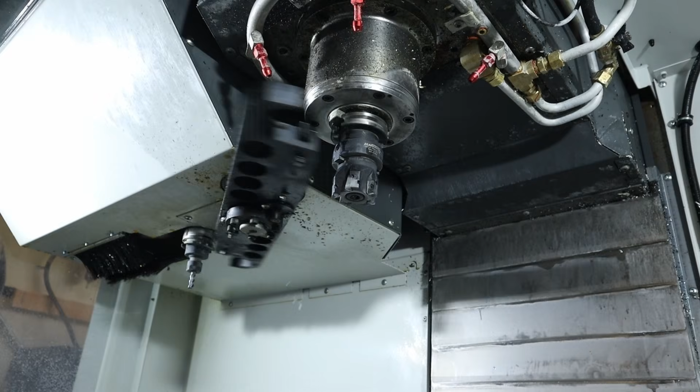27th of May 2026. Today we're going to be talking about links on the Modarra bracelet. There's a few different designs of these links that I want to go over. There's very small details, so I've shown them in the first video, but I really want to show these up close - little tiny chamfers, fillets, and radiuses. I've got Fusion pulled up. The goal is to make a master file, work on making a master program, and dial in how we make these links on the 5-axis.

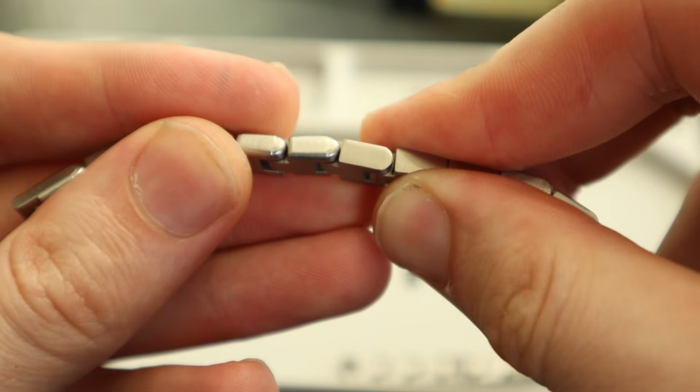Right there, between my thumbs, we have two different link designs. You can see the one on the right doesn't have much of a radius on the edges, and this one has much more pronounced radius, or a fillet, and you can see it there as well. So the question is, which one do we go with?

The one on the right, the sharper one, was the first design I had. It was simply easier to make - machining, 3D surfacing - and it was just like what I had in my brain initially. Then I made a handful of them, as you can see. I thought it would be too sharp, and I thought they looked too boxy and bulky.

So then I made these versions here that all have way heavier of a fillet, and they're just more rounded. Here you can see there's two flat ones on the right and two radius ones on the left. I like both of these.

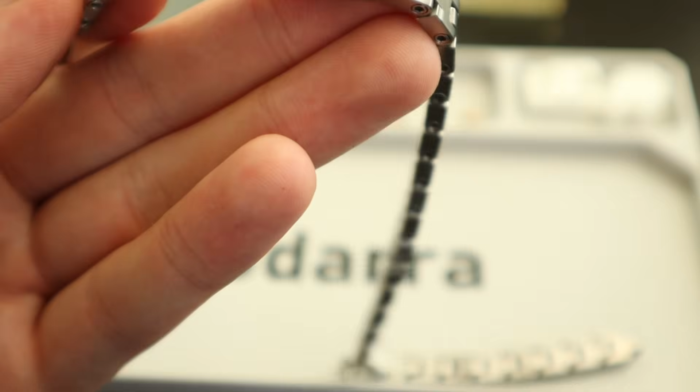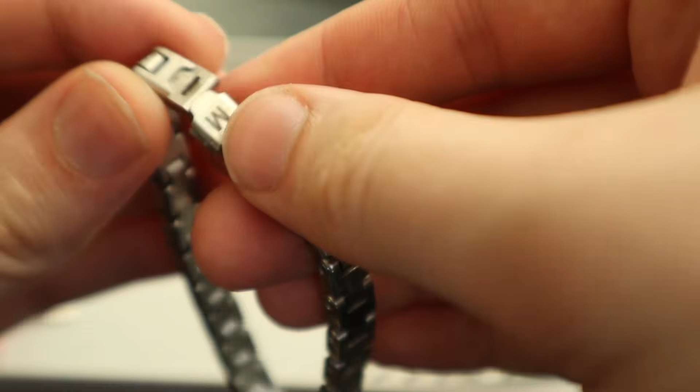Now I think we've got to pick one and make that the first design, and then we can play with this later. The clasp, I guess, is something to think about too - which one looks better with the clasp. The way the clasp I have is pretty heavily radiused. That's obviously totally changeable - any of this is changeable. Let's see if I turn this down. Is that a little bit better?

Again, we have some decisions to make, but the more I wore it, and after polishing it, I actually really like the boxier look. It reminds me more of a watch band. So I think that's what we're gonna go with, and then later on come out with the radius version if people want it. I really like how this one has more surface area to it, especially when it's polished.

So the one thing that is difficult about this is the way I'm making them - we have to deburr them as much as possible in the machine, because tumbling isn't going to remove a lot of material unless it's really aggressive, and I don't want that.

If you see here, you can see that little chunk that's been taken out. That's because I tried to put a fillet on it and the tool was slightly mismatched, and it cut too much into the side of the part on that sharp edge. I think I ended up removing that from the program, and it was just sharp edges.

So the edge that we're talking about here, if I get a pointer, is this right here - these two edges. They're not sharp, but they do catch if you're not careful. So we definitely need to put a radius on there of some kind, and that's going to be tough to do without getting a mismatch.

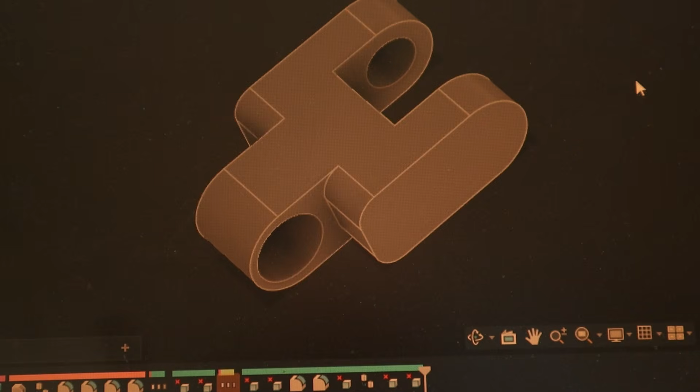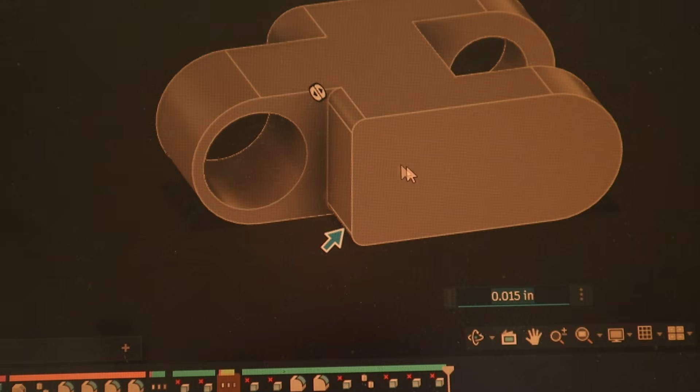Okay, so in Fusion, this is the radius that we're talking about. As of right now, what I was showing you had no fillets on it here, but it created these sharp edges here and here. Now again, the way the links interact, there's not much for this to catch, but I think we need to add just the slightest radius, not much - something like 15 or 20 thou, I feel like would be just enough where it doesn't take too much away from it.

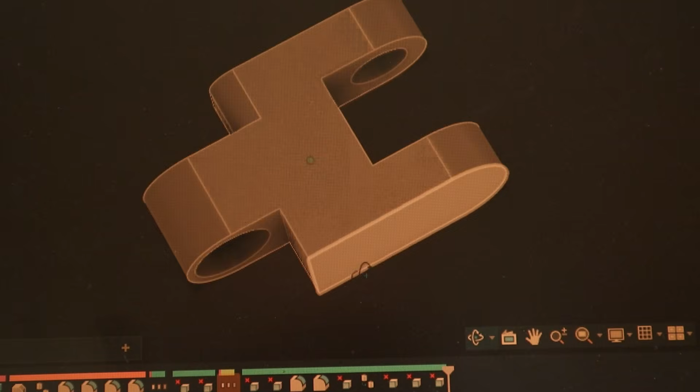Now, the other thing is, this is kind of a rough part file with no fillets or anything on it. In reality, what this is gonna look like is it would have probably, let's say, 20 thou there, and I think I had 10 thou or 15 thou on the outside edge, even on the sharp ones.

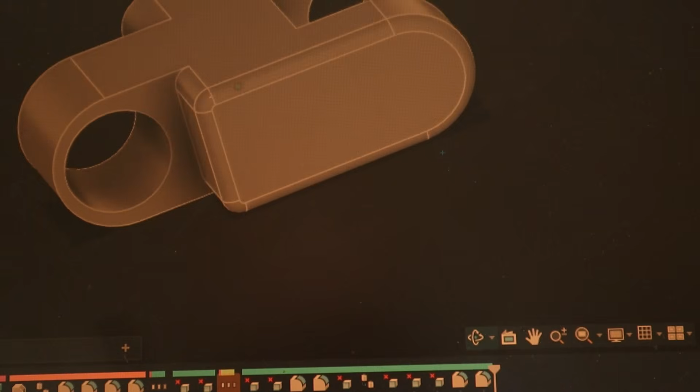They don't look like they have much of a fillet on that longer edge, but there is one. I'll probably have to check back my older files, but in theory, it's gonna look something like that. I think that's too much of a fillet on this side. I think that would look better with like the full radius, heavy radius, something like that in the future, but for now that is too much.

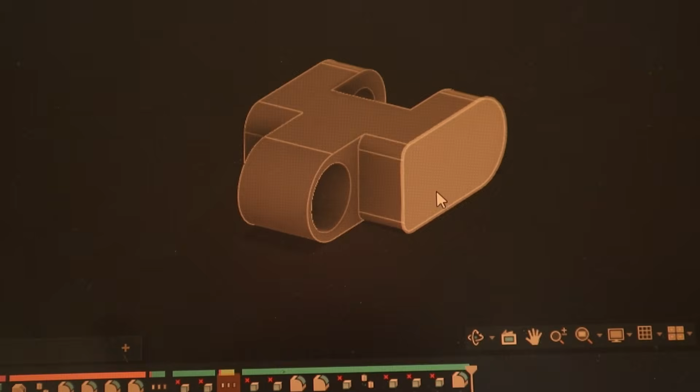So I'm probably gonna delete these, and I'm probably at 20 thou. I think I'm gonna check back at my old file and see what these were, and match that, or maybe increase it slightly, but that's kind of where my head's at as far as that goes. So I'm gonna work on that.

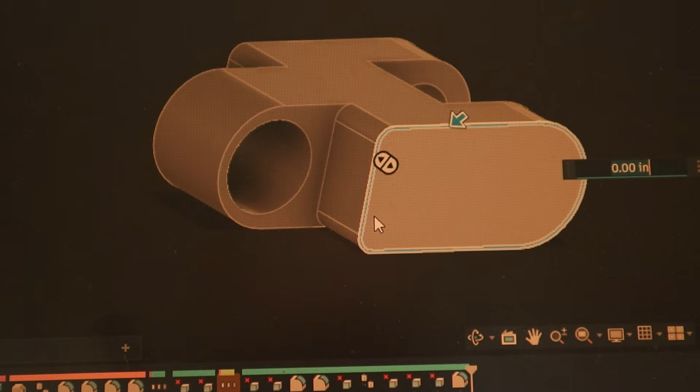I'll show you guys the program a little bit more here, and then we'll go out to the machine and make one. The other thing we have to figure out is the depth of this hole, where the screw bottoms out, that's something we're gonna have to play with a little bit more. I'm currently boring both of these holes because this one does get threaded for 4-40.

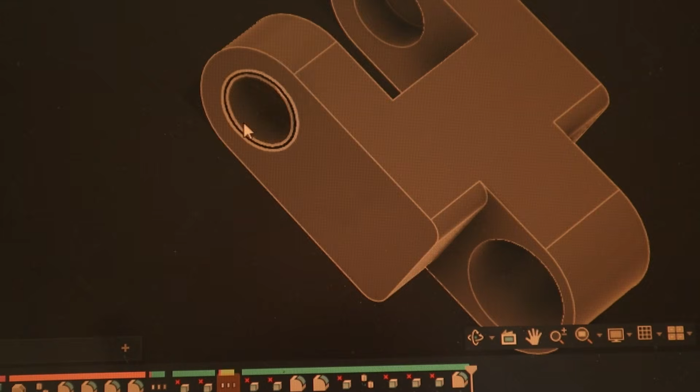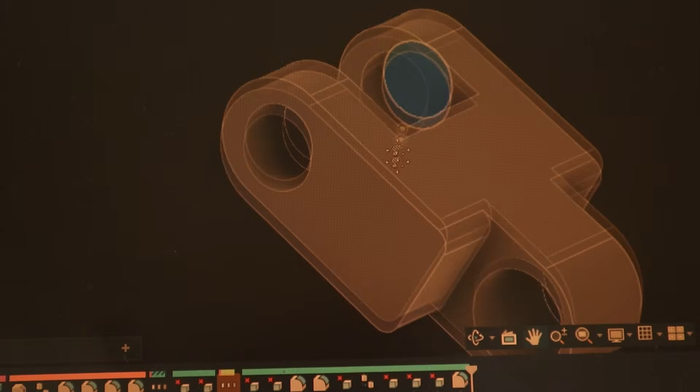This one is simply just a bore. I might end up drilling both of those in one shot to save a little bit on cycle time and tool life, but I'm also boring this because I really want the accuracy. I do like the flat bottom hole here, and there's not much material here to work with, only like 20 thou.

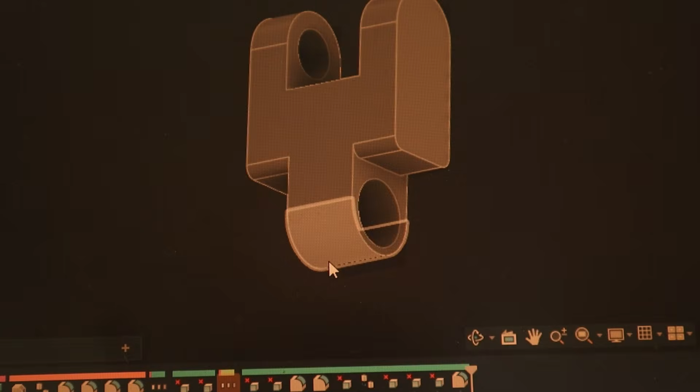So I'm gonna check back and figure out what these fillets should be. The other thing I was just gonna mention is we make these upright like this, and then op 2 is - well, there is no op 2 - there's a tab left on this radius here. I don't like that because there's no good way to remove that radius.

So what I'm thinking is, right now I have the tab off to one side. I'm thinking what I'm gonna have to do is center the tab, and then there might end up being a small flat, and these might have to have an op 2 where we flip them over and I buzz off the top, so there's gonna be a small flat. Now, if that's the case, depending on how much we take off, it's gonna create a really thin section on an already really thin part.

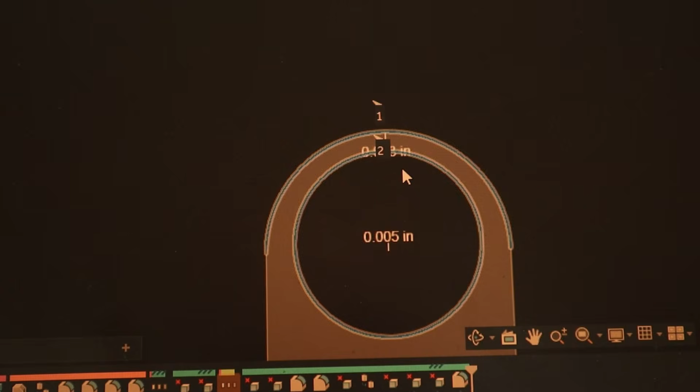That's already only 13 thousandths of an inch, so I might have to beef this up for an op 2. So that's kind of the next thing. The first step is let's nail down these fillets. Let's go make a few of these and then figure out how the heck we're gonna do op 2.

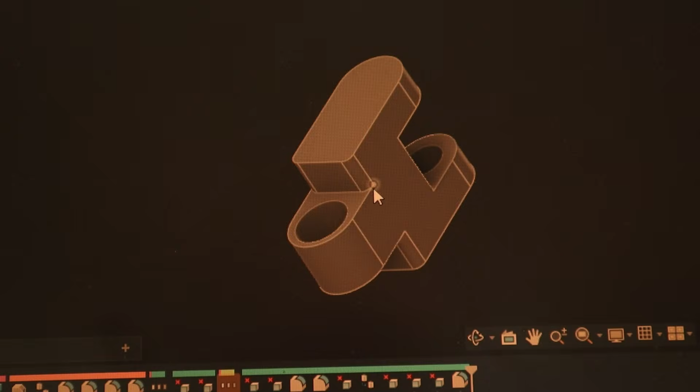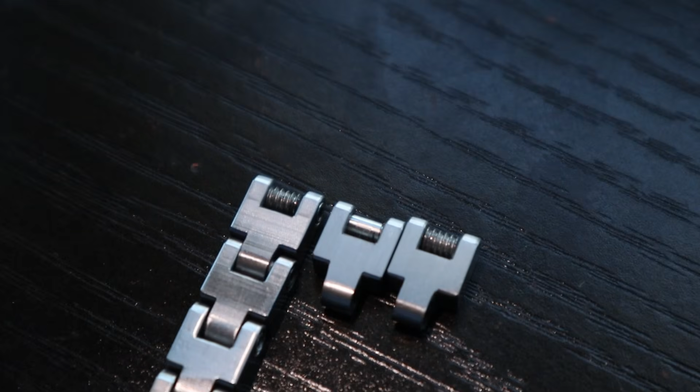Okay, I just played with some finishing, I wanna see if I can show this. So the far left link, it's gonna be really hard to see - you can see it's got, from this orientation, horizontal machining lines going this way. The next link over, I took and flat sanded - let's see if I can get this just right - I flat sanded with 400 grit, and now we have vertical sanding lines but no tool marks.

Maybe if I pick this up and kind of angle it in the light, you guys will be able to see that better. Yeah, you can see the vertical sanding marks a little bit more. Let's see if I can overexpose this. This is gonna be tough. There you go, you can kind of see that. So yeah, now we got vertical sanding marks.

So we started with this, right? Then we went to this, and then I did this on both of these. So this is like off the machine, 400 grit. This is then 400 grit and then 2000 grit, so it's even smoother.

It's so tough to focus on something so small, but hopefully you guys can see that it catches the light more, and it's definitely smoother. You're gonna have to trust my eye here, but it's not polished. Based off of the ones on my wrist that are polished, some of these give off way more light. So I think that's a good route to get rid of the machining marks, but I think we're still gonna have to tumble in some kind of a polishing compound to bring out the shininess of the stainless.

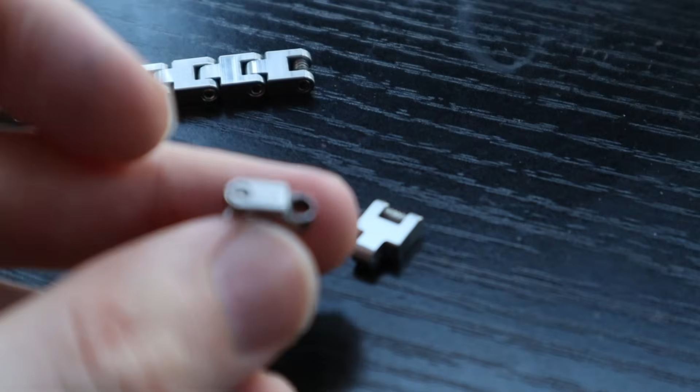The other question is, if we do have to sand these individually, which I really hope we don't, I hope we can figure out some aggressive tumbling method that will evenly pull out the machining lines, and then another tumbling method to polish, because otherwise we're going to have to sand on both sides, and then we're not touching the radiuses at all.

Like I said, finishing on some of these parts is going to be the process here that we're really developing, is how do we finish such small parts. So if anybody has any information on tumbling that they think would work on this, I'm all ears.

That's something I wanted to go play with tonight. The machine is currently busy making something, so I can't go down there and make links, but the next video clip should be us playing around making a new link.

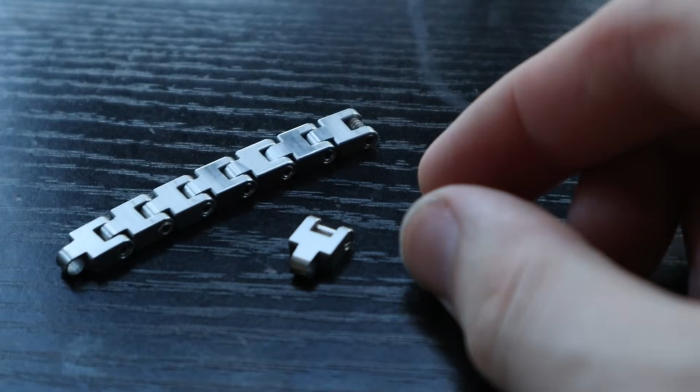Okay, so I've reprogrammed the new link. I made a new file that has the new fillets and all of that fun stuff on it. Now what I'm playing with, while this is still loading and simulating, is how I'm tabbing this part off.

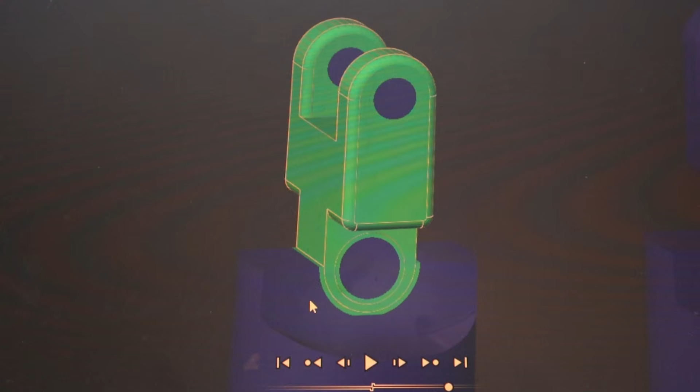I'm trying a different tab method than I did the first time. I think I mentioned how I did it off to one edge here. This one will be a center tab on this radius, and then I'm going to come in and make the tab even smaller.

Before it gets fully cut off, if you will, or gets to the point where it's going to just fall off if I machine any more. So I still think the tab is a little bit too wide. I'm using an 1/8 inch end mill.

Let's wait here for this to load a little bit more. I might have to drop down to something smaller, 1/16 of an inch. I really don't want to, because I want this radius to be cut with the same tool.

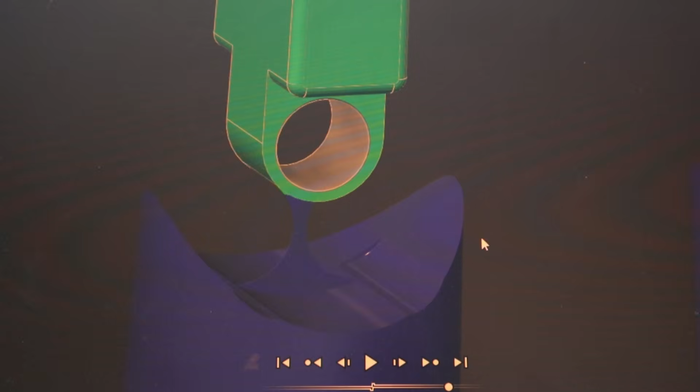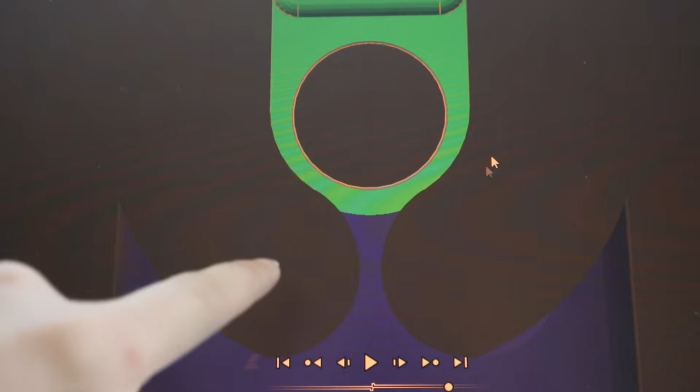Okay, so here you can see I am machining this pretty thin. You can see this 1/8 inch end mill coming in here creating this, and this is basically the width of the tab right here.

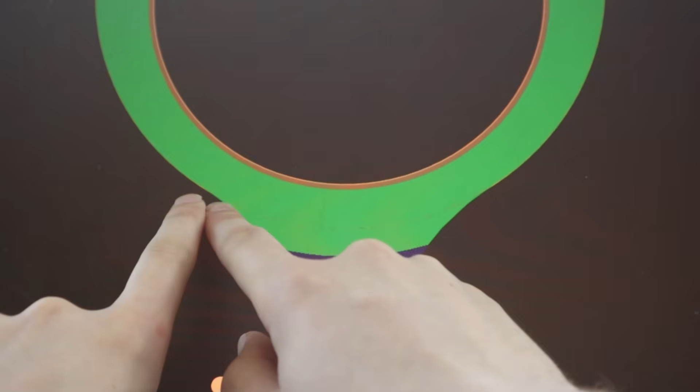So the problem with that is if I go to do an op 2 from about here to here, that's where we would have to machine this flat, and then this gets extremely thin.

And if I rotate this, you can start to see what that tab would look like. Now the problem is I don't know an easy way to finish this if I don't do an op 2 in the machine. I really don't want to have to do an op 2 in the machine.

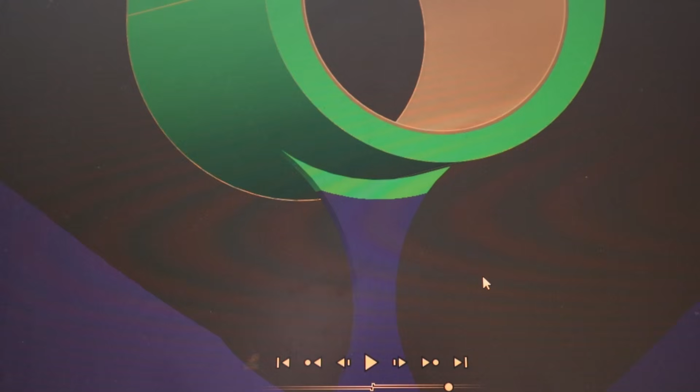This might be small enough I could hit it with sandpaper, and then after tumbling it could blend. That's one hope. It's this weird limbo where I still don't know how these are going to get fully finished. I have an idea on how I'm going to finish the flats, but regardless, this is going to get tumbled somehow.

So that's the current tab. I haven't tried this yet, so we're going to try this. You can see I have this fixture where I'm making, what is this, 8 or 9 of them at a time. I'm only going to make one at a time here, and we're going to prove this out.

So I've got to figure out in Fusion how I get rid of this pattern feature, because right now everything's patterned.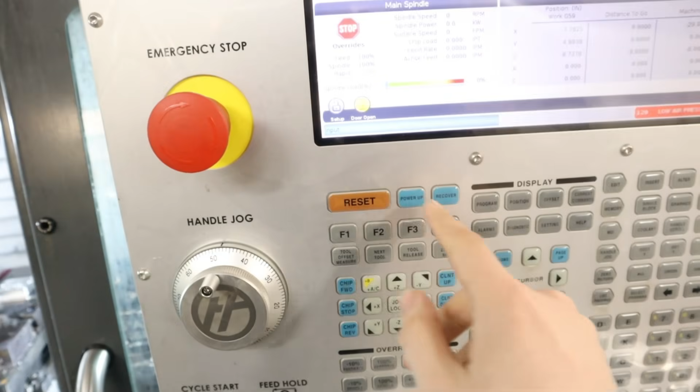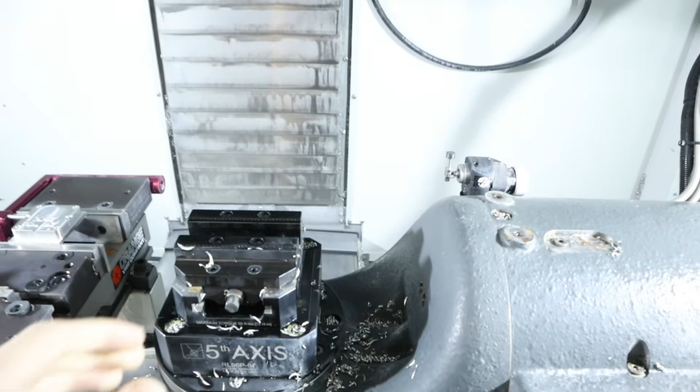Alright, so we're going to be using the TRT 210 here. I'm going to put in some parallels here. We've got our fixture that'll go in here. It's just a piece of steel with these V channels cut in them, and then we've got set screws.

This seems to work really well for holding the parts. There's not a lot of machining forces on them. So we're just going to use this first spot for now to prove out our program, and then we can pattern it across and do a whole set. That'll obviously speed up cycle time because it'll be a lot less tool changes.

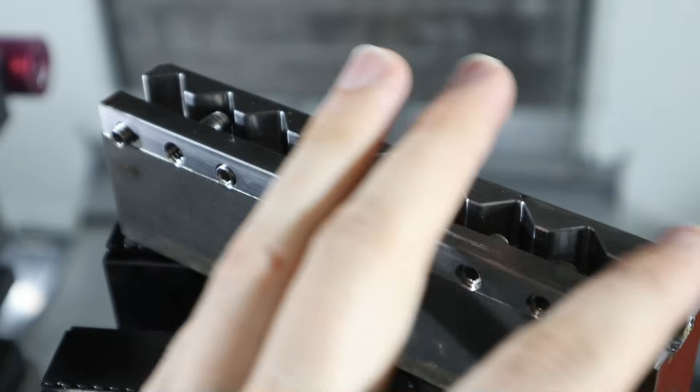We can use the first tool, a 3/16 end mill, on all of these parts, then change to the 1/8 inch end mill, and go to the ball mill, etc., etc.

So this I made a while ago for testing, and it's been great. Before, what I was doing was using a collet block and putting one little stick of material in at a time, and that was a pain in the butt because I had to undo the vise, take the collet block out, undo the collet block, and reset it every time. Versus this, I can just leave it in the vise and do everything with an Allen key.

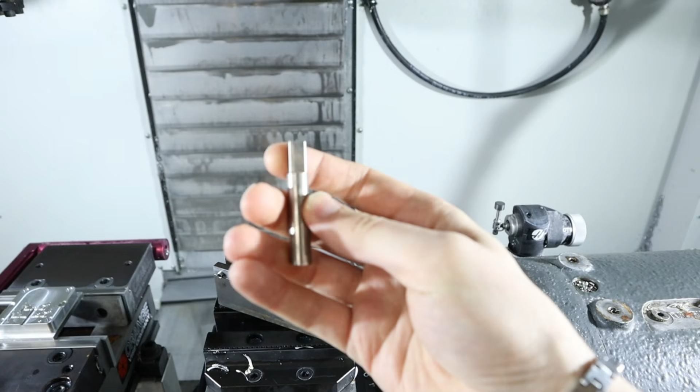One thing we are going to have to start to think about - this is a bad part that I stopped for some reason, but as you can see here, we can focus this. This is a little bit long, but there's a lot of wasted material because we're putting this in here like so, and part of the reason we need some of the height is to get further away from the vise and the fixture so we don't have any collisions.

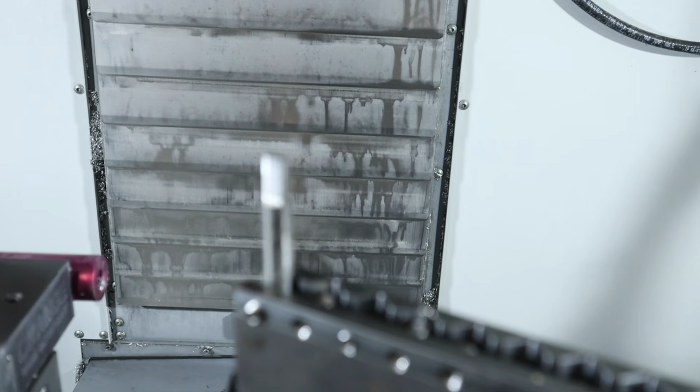So for now this is okay because we're just testing, but once we go to production we're really going to want to start to think about this from a cost perspective. Luckily, this material is pretty inexpensive - it's not like this is titanium or anything. But when we go to those more exotic materials, this is something we're gonna have to really think about.

Obviously, I fully understand that this machine is not the ideal machine to be making these parts, but it's what I have. Until we prove out the business and the products and whatnot, I think we're just gonna have to use this. Long term, a Swiss and like a Willemin style machine for something like this would work really well. So that's what we got for now, so we got to make it work. These are our constraints and we're gonna work with them.

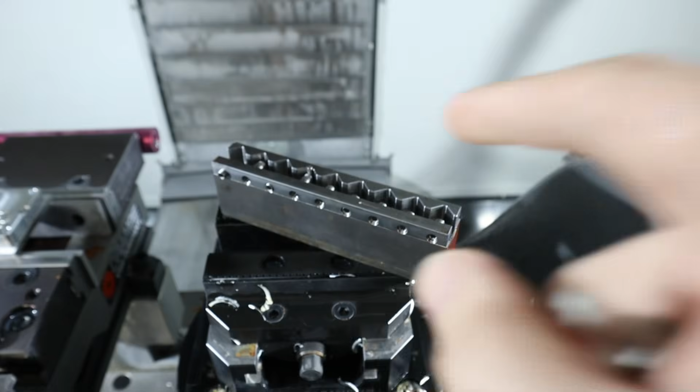So I'm gonna load this up with a parallel and then get a little piece of material ready to go.

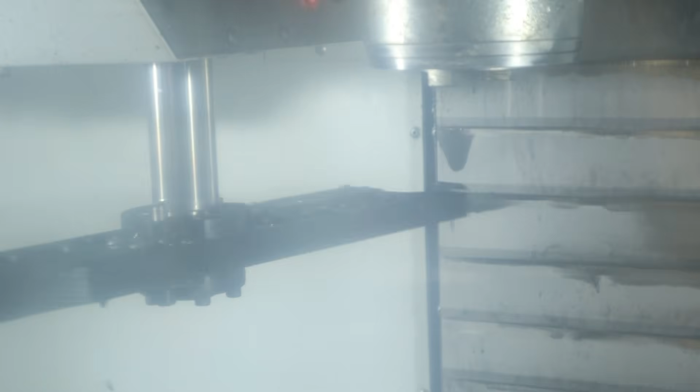Okay, so let's move this guy over here, and I need to double check. I believe my Z0 is just the top of this fixture, but I know X and Y are just the center of this, so we're just going to center this up.

Look, you guys, it's actually a pretty good angle, I feel like. Okay, so where's my tape measure at? 6 by... inch. Yeah, alright, so that should be fine.

How did I do this last time? I think I might have done it off the corner, actually, because the center slot was - oh, maybe I just went far enough down. It's a good question, I don't remember how I did that. So I machined this edge around the top, and that was for probing reasons - I wanted something that was machined when I machined that. Now, granted, this really doesn't matter. I think I just went off the non-machined surface. I think that was fine, because if we're within even 5 thou on this, we're totally okay.

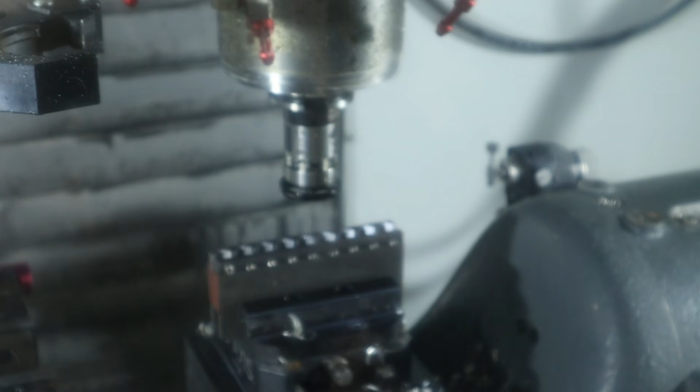So we'll do single surface, minus half inch. Okay, so this should be fully probed in. So you guys in focus still? Yeah, okay, this should be fully probed in. I'm gonna go check my program.

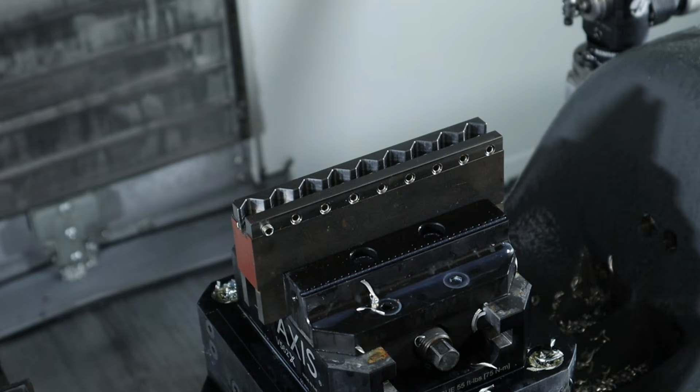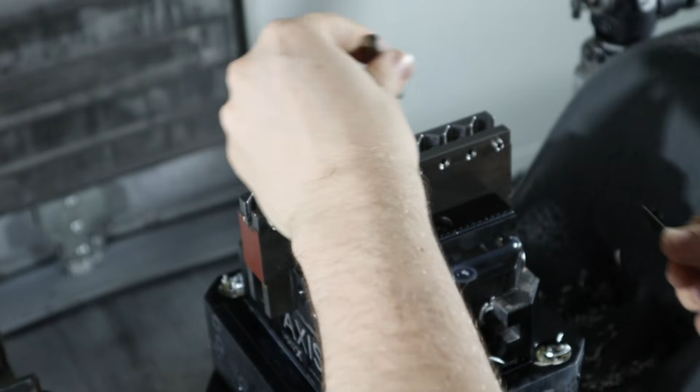I'm gonna cut that piece of material, we'll load that up, and then let's run it. Okay, so we got our first blank, double checked, top center of this is indeed our G57. We've got a blank that's 1.56 inches long. I wrote that down because we're going to start with that and see how small we can get that in the end. But we don't need this thing to be completely bottomed out. We only need it to be enough to be contacting the set screw. So as of right now, let's see if I can...

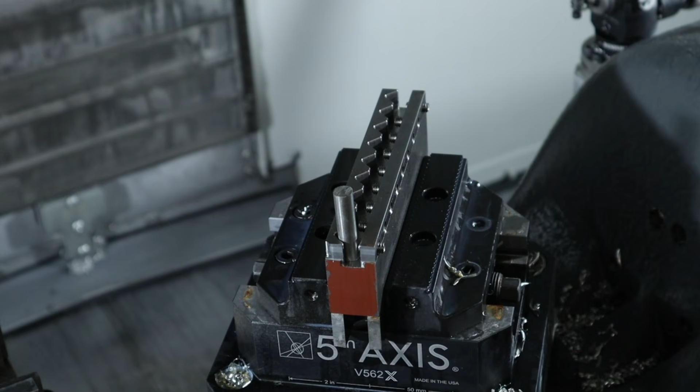I don't know if you'll be able to see this or not. Yeah, maybe. You don't need it up against the floor of this fixture. So if I get in here, you just need it to be in contact with that set screw. So I'm actually able to come off the floor. That's probably 3/16 of an inch right there.

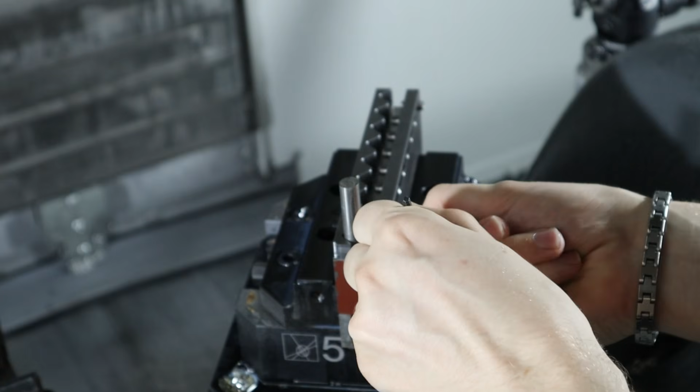So I'm gonna go ahead and tighten this down, and we'll find a torque value for this eventually, but I'm going just kind of off feel. But surprisingly, the bottom of these set screws actually dig into this steel just a little bit.

It would be interesting if this is the way that we end up having to go just temporarily while we are using this machine to make fixtures. It would be interesting if we modified some set screws to have a little bit more of a point to them to really grip into the material. I could see us doing like a crosshatch pattern of teeth. But for now, this is gonna do.

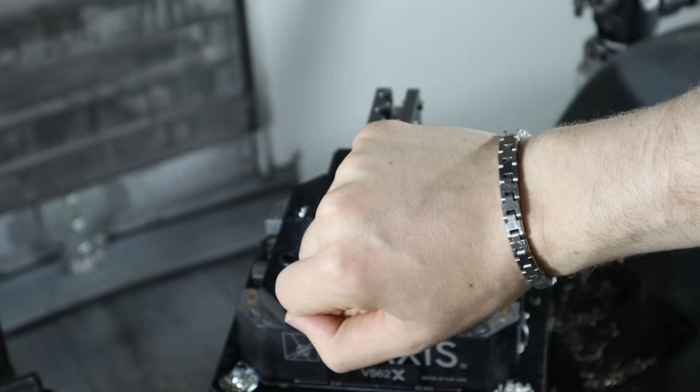I also just love how my bracelet is just always in the frame while we're talking about what we're working on. I think that's kind of cool.

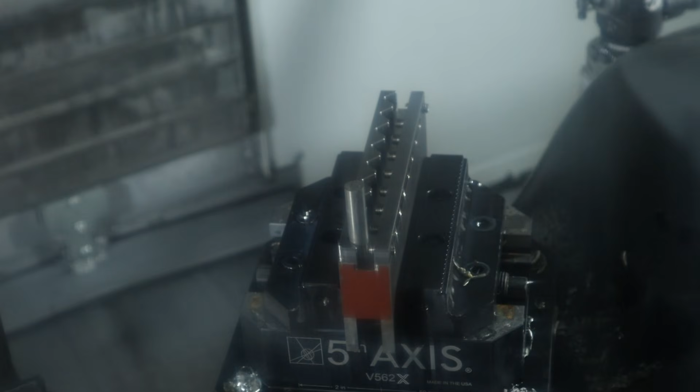So, all right, that's in place. Program is loaded, we should be good to go. So let's see how our viewing is once we get started here. I might have to readjust, but let's go to this. We're gonna start off with a facing op.

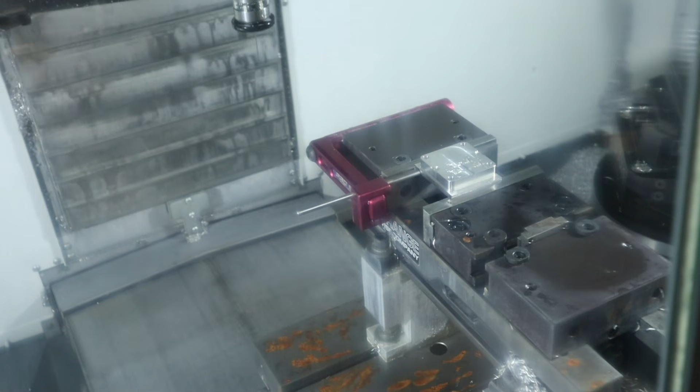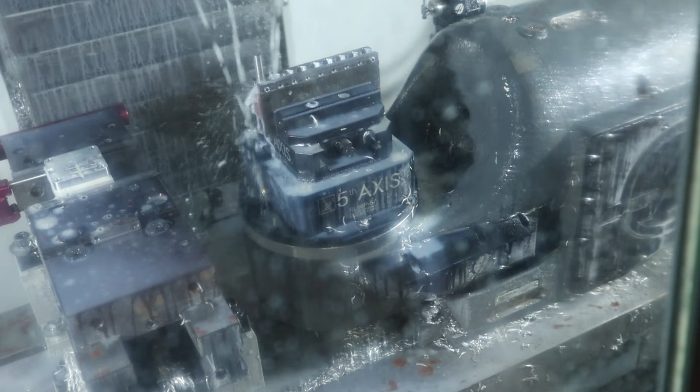I'm gonna have to wait here for a second. I'm gonna go over to our safe position here. All right, how is our angle? I have no idea if I'm gonna leave this footage in or not, but I figure better to have it. See if I can try to focus it on there. All right, now I gotta go full machinist mode here and watch this work.

Okay, so already I can tell you our stock is too short for this program, so we're gonna have to repost. I had to reselect quite a few things geometry-wise. This should work. All right, let's give it a shot. Here we go, see what we got. There we go.

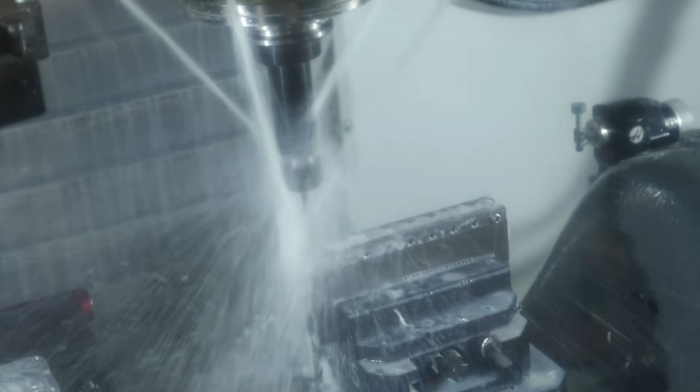So we're gonna face off a little bit here. Definitely a little bit of chatter there. 8,000 RPMs, 15 inches a minute. I don't remember the depth of cut.

Okay, now we're gonna go in here and we're gonna cut the profile. I'm pretty sure this is just a contour with multiple passes. I really should change this to 2D adaptive, because I feel like it's taking larger cuts when it's entering there. Still 8,000 RPMs, this is 10 inches a minute. Again, I'm not trying to make this fast right now.

All right, so we just finished machining the link. There's a bunch of little tweaks to this that we got to make as far as tool paths go, some efficiencies on the machining side of things, and then actual cutting of these features. So we start from the top. I slowed down a few speeds and feeds. I added through tool coolant to a few operations.

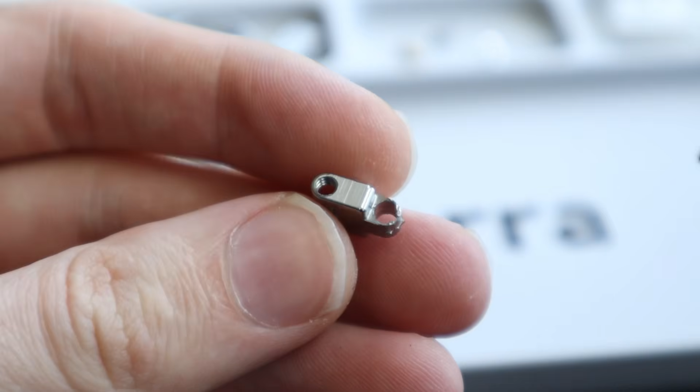And then the first issue that I see, if we flip this link to the side here, when we go - let's see, where am I? - when we go to cut this here, and we cut the fillets on these walls here.

Now the problem that I see, and I don't know if I'll be able to pick this up on camera because it's so small. We have one side here, you can see the fillets right there. Flip it over, see how it's machining into this face here.

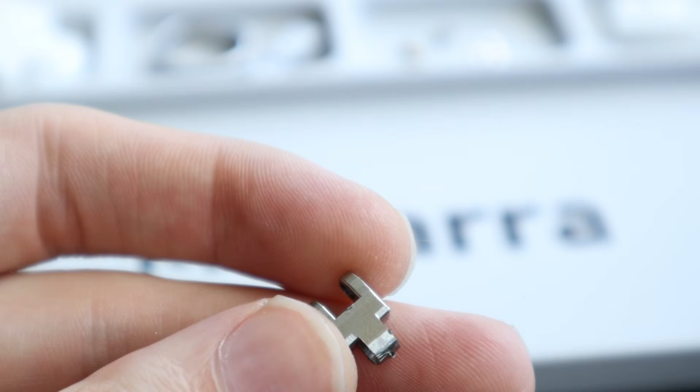I don't like that. What I'm wondering is, if I look at my tool paths, this is all done by Tool 22, which is a 3/16 end mill. If I click through these, I'm wondering if that shouldn't be cut by that tool, if that should be cut later by a different tool, being the 1/8 inch tool.

But again, the only reason this would be happening is if this is shifted left or right just slightly. If I look at this off camera, it's barely doing that, got to be like a thou or two, but it's obviously visible enough and I don't like that. That would cause problems down the line in finishing, so I got to figure that one out. So I might try reselecting those finishing tool paths and have that get cut later by a different tool.

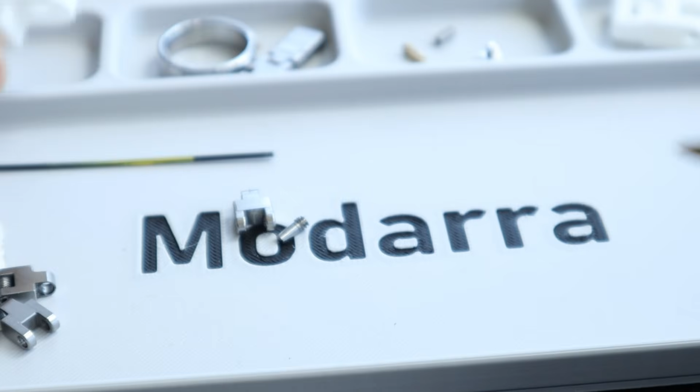The next thing is when we go to cut this slot in the top. So we have an adaptive tool, an 1/8 inch tool that comes through here, and full depth adaptives this, more or less slotting it. And then I have a finishing pass that comes in. Again, if I use my larger example here, it comes in and finishes the floors and then this internal radius here on both these kind of tongs, if you will.

The problem with that is I had a lead in and lead out that was set, and I don't know if you'll be able to see this. You can definitely see it on this side. It was cutting into this surface here, and it was coming out, leading out, and cutting this. It's barely noticeable, but the problem is I see the step over line and I can barely feel it with my fingernail. I don't know if I can show this, right there.

So I changed the lead out so it shouldn't do that anymore. That's a pretty straightforward fix.

Fillets on the top, these radiuses on the top of the tongs, I'm still getting this little step over line again. I think I showed this before, right there, you can see them. I think the only way to fix that, I feel like that's probably my set bottom Z height for the toolpath, so maybe I have to extend that.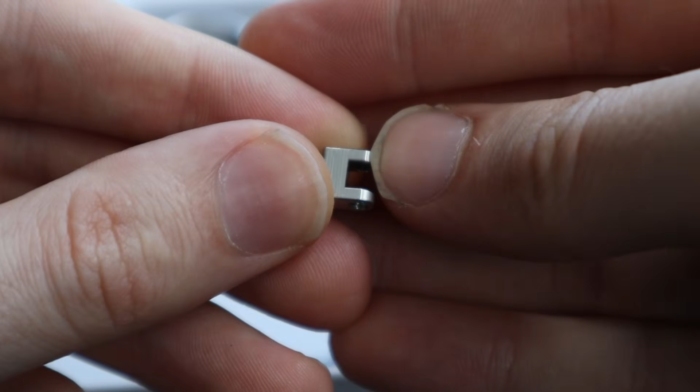But the finish on the tops of these is really nice, I'm really happy with the finish of those. But again, it's just a mismatch right there, you can see it by my fingernail. So gonna have to play with that.

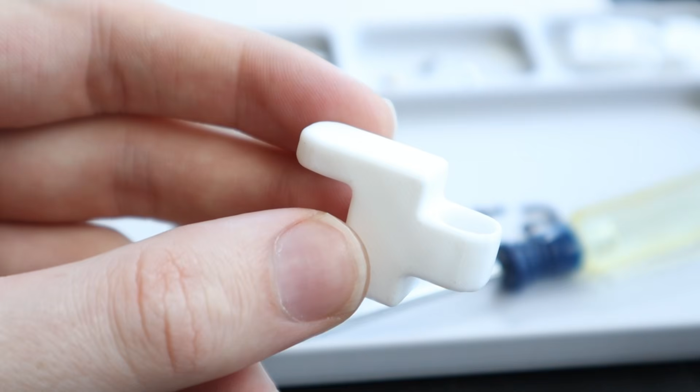If we keep going down the tool paths, one thought was, if I use my big example here, we have a fillet all the way around the top of this part. We're cutting it in a bunch of different operations with different tools, and I'm wondering if I should remove that and cut them all with the same tool. Because we have these internal ones being cut by the 1/8 inch, that's fine. But we have this top one in this orientation cut by the ball end mill, like so.

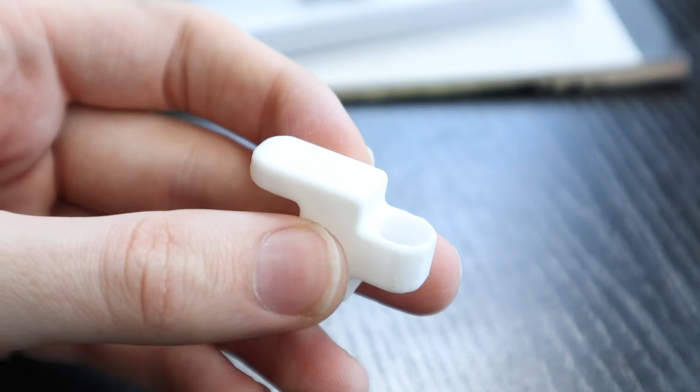Let's just do this, let's move this back, like so, and that's cutting this outside part. The first tool that comes around and profiles this is cutting these long edges, and then we rotate it and cut these 3 fillets here with the same ball end mill. So we're not using the ball end mill to cut all of these.

I think that's a mistake. So I think what I need to do is remove the first tool that profiles this, so it doesn't profile those fillets. When we come to rotate here, I'm just going to do all of these fillets in one shot. I feel like that's the best approach here. It's gonna add probably to the cycle time quite a bit, but if that's what it takes, then that's what we're gonna have to do.

I think that would clean up some of these fillets. One thing to note is this is, I believe, our 15 thou fillet. If we lay this next to a 10 thou fillet, I don't know if you guys can see the difference, but it's definitely more rounded. Hopefully it's not too much, so that's something I gotta pay attention to.

The tabbing didn't work. There's two operations, the left and the right, that do the final tabs I showed you guys. After the first one, this thing flew off. Luckily I saw where it went in the machine, so you can see it's all chowdered up there.

I also think I'm gonna need to order a small spot drill to chamfer this top threaded edge and both sides of the link hole. They have burrs right now, and I'm not chamfering this hole before I thread it, so that's definitely part of the problem. That would add an actual decent operation there. I think I'm gonna play around with these tool paths and come back when I have something.

This is now my... let's see, we did this one here, then this one, then this one, and now the one I'm just on. So this is the fourth one we've done.

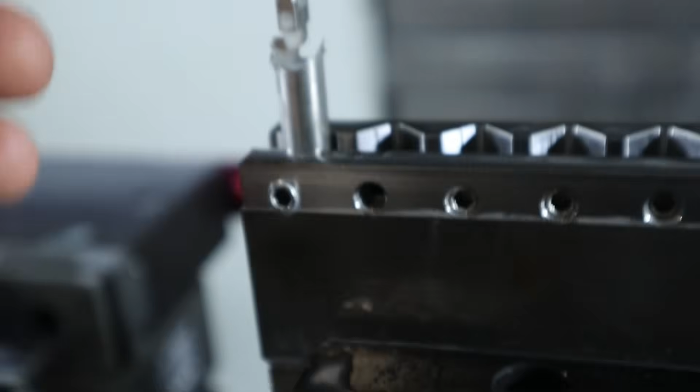We didn't fully tab it off. I could break that off if I wanted to, but this is going to be testing a lot of new things, so I'll get this off and get up close with you guys.

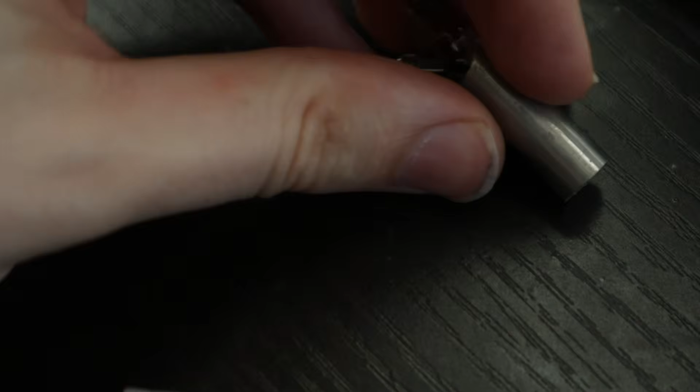All right, so we've made four parts today. This is the latest, and I'm going to try my best to show you guys the improvements here. The biggest thing was getting these flat faces to be as clean as possible, and then getting the edge breaks to work properly. So this is my pointer here.

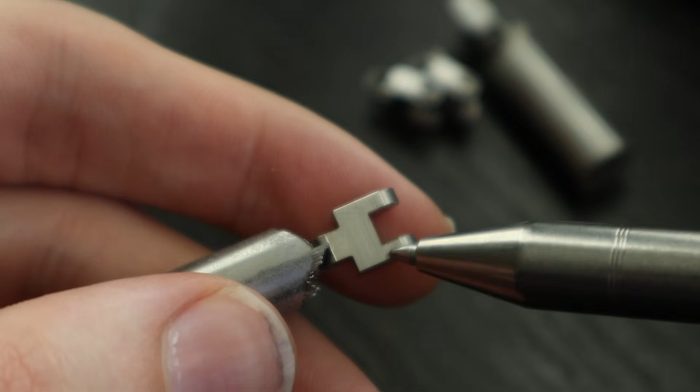I hope that's gonna focus okay. So we'll just go for it. You can see how these faces are nice and flat here. What we had on the first part, you can see those lines there and there. That was the lead out from this toolpath here.

We were having these lead ins and outs mismatch because those were radiuses of the tool going around like this, so I changed them to chamfers. Now there's no lead in or lead out. Well, there is, but it goes off at an angle and it's tangential, so it doesn't actually touch this face at all. Even if it was mismatched, it would just make this chamfer slightly larger than the other side, but we're talking about literally like 1/1000th of an inch here, so you're not going to see it.

But obviously, if there's a lead in or lead out mark on this face, you're going to see it like I just showed. So we got rid of that, and did the same thing on these edges here. Now it's just a chamfer here and here, and these radiuses are now changed to small 5 thou chamfers around. You can see the light hitting it there.

That's all 3D machined from this orientation. This whole edge all the way around is machined in one shot using a 16th ball. So instead of doing part of the radius here, then part of the radius here around that side, and then doing it there with three different tools, we're doing it all with one tool in one operation, and then we rotate it and do the same over here. So that has been amazing.

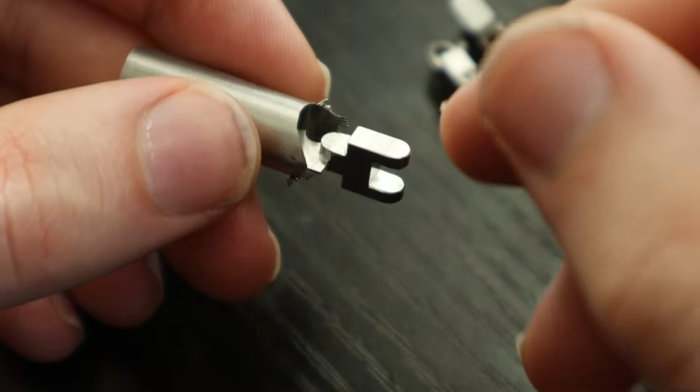This one I didn't drill or tap simply because I wanted to prove out everything else. The drilling and tapping was fine up until this third part. I broke a tap, I don't know why.

Along these long edges, I changed it from a fillet or radius to a 5 thou chamfer, so we actually went smaller. It was originally 15 thou radius or fillet, and now it's down to a 5 thou chamfer. I actually like this more. It's just enough, it catches the light, and shouldn't cause finishing problems down the line.

There's still a few minor problems with this part. We might save that for part 2. There might be two parts to the links because these might take me a little bit longer to figure out.

But there's some tooling I want to order. We are currently boring this hole here and this hole here that we tapped for 4-40. There's no real reason we need to do that, the more I thought about it. The only thing I need in theory is a flat bottom hole on this second one, for our custom screw to bottom out. I think we could get away with drilling both of these. I know for a fact we could get away with drilling this one - it doesn't have to be tight tolerance at all. With a carbide drill, I think we could hold plus or minus 2 or 3, that'd be fine. And it'll be way faster, that's the thing.

So I timed it on the machine because Fusion's estimated machine time isn't really that accurate - there's a lot of variables there. I timed the boring operation for this hole and this hole, and it was like 1.5 minutes. For a full bracelet, which is 25 links, that was like 30-some minutes. We really got to start thinking about cycle time on stuff like that.

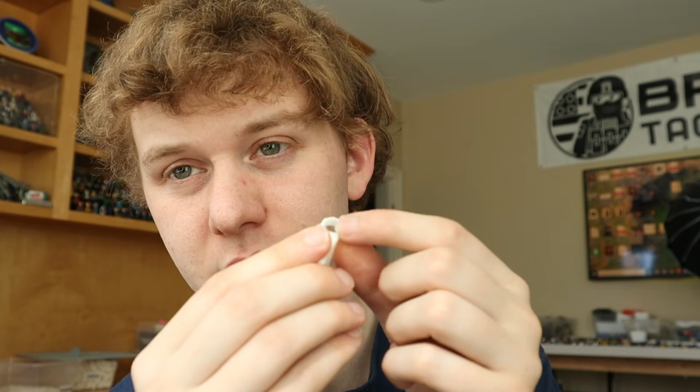And then also, like I mentioned, I'm not actually chamfering the drill and tap hole. I don't think that's why the tap broke, because ironically in that program I actually did add in a chamfer. I don't know why it broke after I chamfered it - that doesn't really make any sense, but anyways.

Longer set screws for the fixture. Thread gauges and drills, talked about that. Chamfer tool, talked about that. Maybe some more 1/8 inch end mills, but stubby - right now I think I have a 1/2 inch length of cut, which is a little bit overkill.

The gist is we're in the right direction. It's overall a success. I mean, I've done all of this in the past - like it's now 4 o'clock, almost 4 o'clock, what, 5 hours? Plus I haven't been doing this all day, so I feel like that's pretty good.

As for the deburring of the part, I need to look at this under a microscope - I still feel like this could be better. I think we could end up just changing the deburr to all be a chamfer with the chamfer tool. That would machine much faster, and I'm getting some inconsistencies here from 3D machining a 5 thou chamfer, so it's pretty small. Also cycle time wise, I know I could just come in there and hit that with a chamfer tool - I just don't have a small brand new one, so I want to get something better.

I think we're getting way closer to nailing down a model we like and starting to get a template of a program going, so I'm really happy with that. Still got to figure out how to tab these things off a little bit better - that's all I can say. I don't want to keep rambling, but that's where we're at.